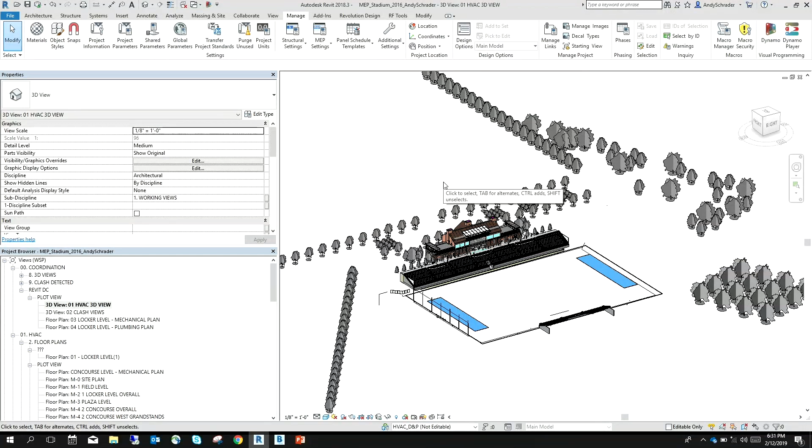So here we are in a Revit model that we're going to do some clash detection on. It is a football stadium, and you can see what it looks like. On the MEP side, which is the arena that I work in, it's going to look something more like this. As we can see, I've got the architecture turned off because for this purpose I'm just going to do structure, which is what we're pretty concerned about while we're doing our MEP modeling. Here we can see everything that's in here - we've color-coded the mechanical, electrical, and plumbing. The HVAC is green, the electrical is red, the plumbing is magenta, and technology is blue.

All right, how many people out there use the interference checker?

This tool has been in existence for a long time, and I feel like it's really lacked a lot of functionality that could be added to make it awesome. If you're doing clash detection, a lot of us probably go to Navisworks or some other platform to do it. It was awesome when I learned that clash detection is in the Revit model, but it's not that great.

Tonight, hopefully I can persuade you with this process to possibly use it. First thing we're going to do is create a project parameter, because we want to grab those elements. We're going to do clash detection, which says this element is clashing with this element. Revit is a graphical database, so it's going to assign those things a number. We'll capture that number and put those elements together. Simple as that. So first we want to be able to label those elements.

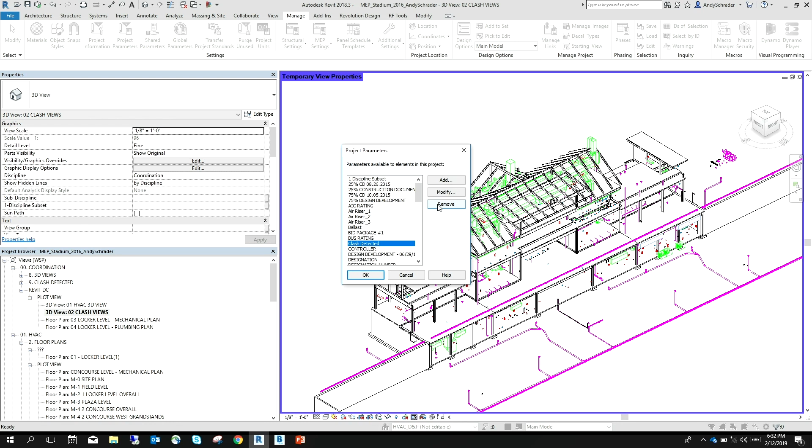So we'll come down and create a project parameter. I've already created it, but I want to talk through what's unique about this. We gave it a name, clash detected, and given it the type of parameter as text. I used to use the yes/no parameter because that worked perfect in my mind — does it need clash or is it not clashing, yes or no?

But the functionality of whether it is in a group or not, you can't manipulate yes/no if it's within a group. So using text, I can do that outside of that group, which is the reason I switched over to text. Then I'm going to come over to the categories.

You have all these different categories in your Revit model. What I want to do is just grab the ones I'm going to see in a 3D view and that I'm worried about with clash detection. So you can see I've got these checked: air terminals, cable trays, and the unique thing I want to leave out are the things already grouped together, like a cable tray run. A cable tray run is fittings and cable trays put together into a group.

So if I've already got them independently, I don't need that system or run. You'll see with the cable tray runs, conduit runs, and duct systems, I don't need those because I've already picked out those parts independently by having duct accessories, duct fittings, and ducts. So we'll go through here and check all of those items that you're going to see in a 3D view. There are things you don't need checked, that you don't want extra parameters lingering within that family, like grids or zones or levels. So essentially I've gone through and just checked those items we're going to see in the 3D view.

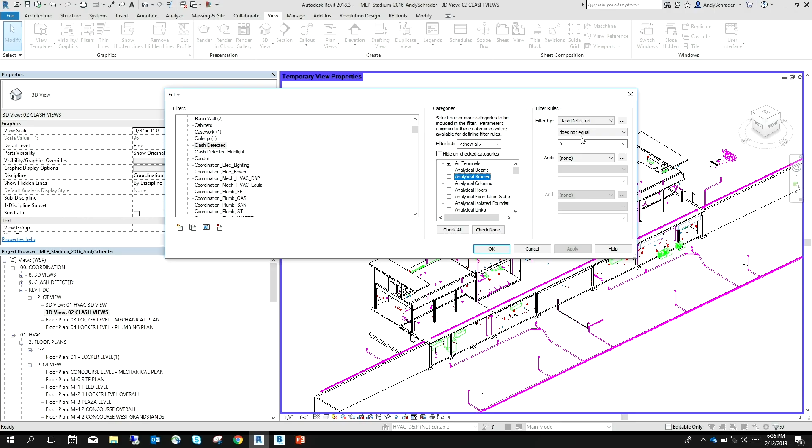So I can back out of that without ruining this whole list. Then we're going to assign that project parameter a value that does not equal Y. So we're assigning this Y, meaning yes, this is an element that is clashing. The reason we want to do that is because we're going to use it as a filter, looking for all the things that are not clashing so we can turn them off. It's kind of the inverse of what you might be thinking.

Then we have another one. So now we've just created that, and we're going to duplicate this. We're going to call it highlight. With highlight, what we want to do is make this thing shine among all the other things that are not clashing, so that way we can see what parts and pieces are clashing with the other elements within our model. Does that make sense? You'll see when I get there.

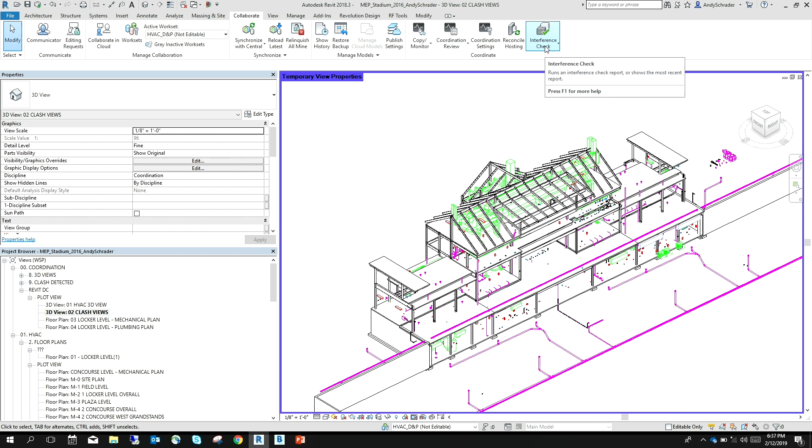All right, perfect, so that part's set up. The next thing we want to do is jump over to the interference checker. If you've used it before, you can run the interference check, and the way we're going to do that is just select these elements within our model, like so. The nice thing about this is I'm not doing my whole model, I can grab parts and pieces out of it. So if I'm doing a particular amenity space, I can focus on that, whereas in Navisworks I'd have to do a lot more setting up of a particular region.

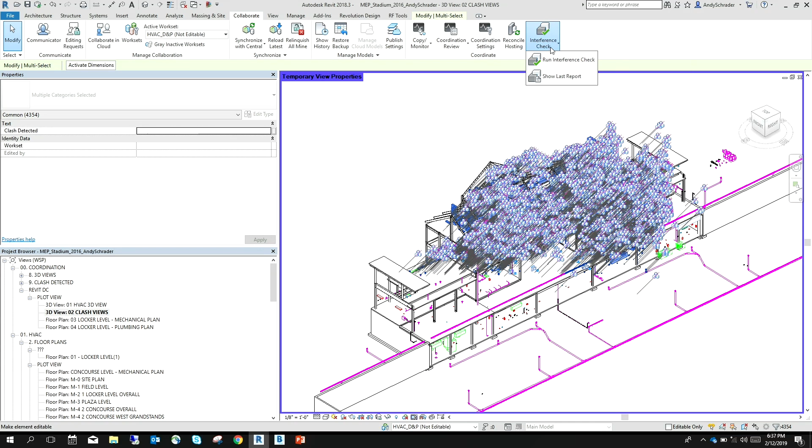So we're looking at 4,354 elements that I'm holding onto. I'll jump back over to the Collaborate tab and go to my interference check and run an interference report. If you've never seen this before, it's column A versus column B, all the things I have selected on the left versus the same things I'm looking at on the right. For this particular clash, I'm going to do my MEP versus my structure, so I'll change this second column to my structure model, and I'll select the items I'm concerned with here: columns, foundations, and framing. And I'll say OK.

Once again, if you've never seen this before, you're like, wow, that's pretty cool, I can do that. Well, then I get this dialog box, and this is where the unfriendly portion of this comes through—it's nice that it tells me all of these things, but then I have to do a lot of clicking to actually get this data to do something for me. So if you open this up, for instance, I can see that I have an air terminal clashing with this particular beam, but it's a lot of work to go through all of these clashes, and right off the bat I don't even know how many clashes I have.

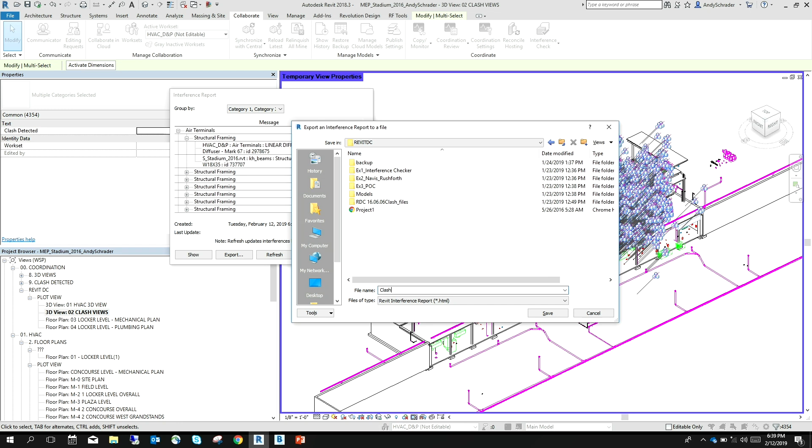So the way around this is we're going to export this. If you export, this is going to make an HTML, and we'll throw that into a nice folder that we've pre-baked, and we'll call this clash, and we'll put a date with it, 12/19. Awesome, all right, so very quickly we've done our clash.

That data is sitting somewhere else, and I'm going to close out of this. All right, come on, get my model back.

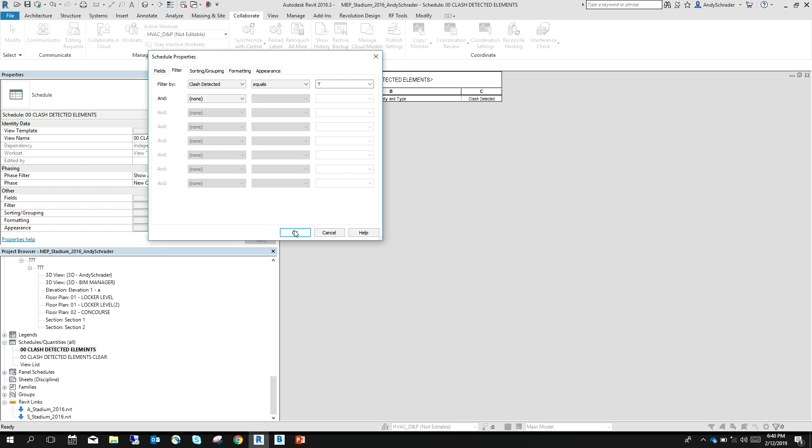Just to show that there's no smoke and mirrors here, we have a schedule that we created that is looking at these elements. Essentially we're creating this multi-category schedule, and it's just pulling out whether that family is on a particular level, what the family and type is so we can see what it is, and whether that value is clash detected. Remember, we're going to assign it a value—haven't assigned it yet. And then we're just filtering by all of those elements that have this value. So we're going to access that. All right, perfect, so now we've done all that.

Let's jump over to Dynamo. So we'll go to our— I'm going to use 1.3.3.

Does anybody not know what Dynamo is? All right, perfect, awesome. I will take that as I totally know what that is.

All right, so I've got it right here. I'll open that file up, and it looks like this. So as you can see, it's not super huge.

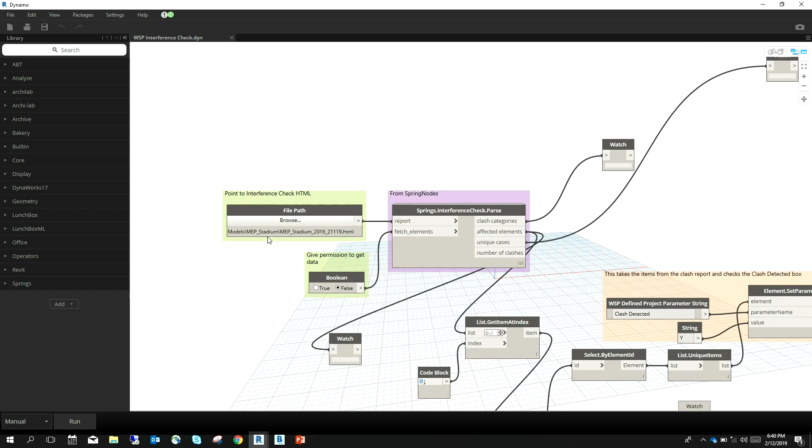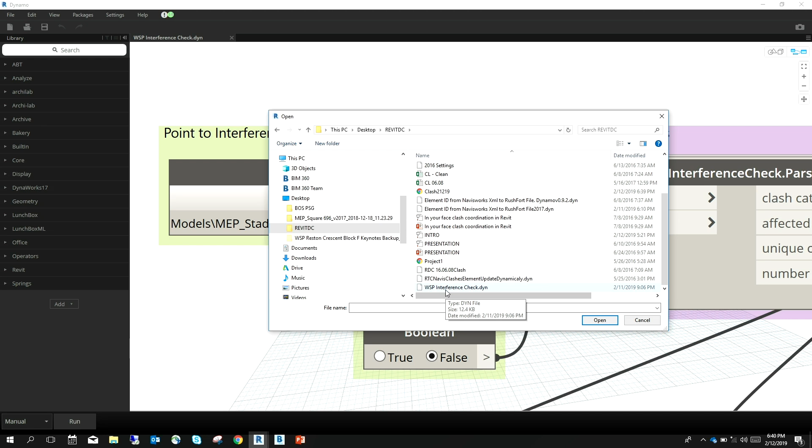The first thing that we're going to want to do is point to that HTML that we just set up. So I go back to my folder. There's my Clash, and I'll open that up. So now I'm pathed to there.

What's the rest of this stuff do? Well, I'm going to look in that file, and I'm going to use this package called Spring Nodes, and it's going to pull that data over, and then it's going to fetch those items within an HTML that's broken out into a crazy structure, if you've ever opened up one of those before. I don't know programming enough to decipher why it's all spaced out like that.

But then you've got all of this data that you could pull out of that. So clash categories, affected elements, unique cases, number of clashes. That's going to make a list for me. So if you'll remember, I had column 1 and column 2 out of that, and I'm going to separate out those columns so I can pull that data into my model.

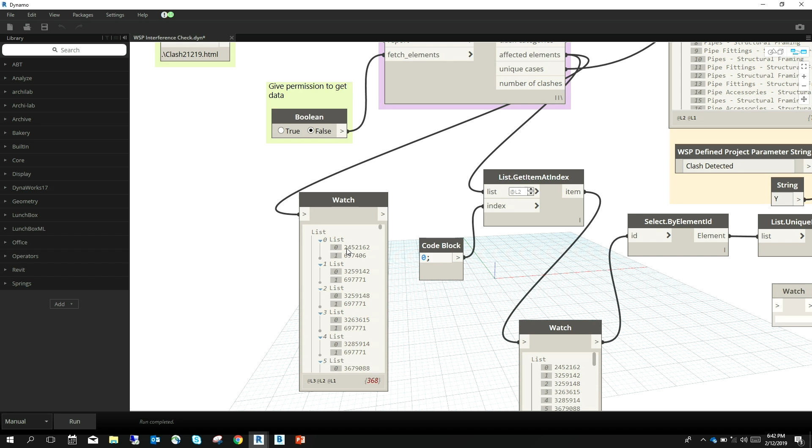So I'll just run this so that we can talk about it. Boom. All right, so here's my list right here, and you can see that there's list 0 and list 1, so that's 1 and 2.

And what I'm going to do out of this get item at index is I want all the items out of 0, which was my MEP. If you remember, the first column on there were all my MEP objects, all the other ones were the structure. So for this first take, I am going to do the MEP objects. And then grab those unique elements, and you can see that they're green over here, so they're live within my Revit model. Perfect. So just like that, I can move this piece.

All right, so I've already run it. And now we'll see that now the schedule is populated with all of this stuff in our model. Perfect.

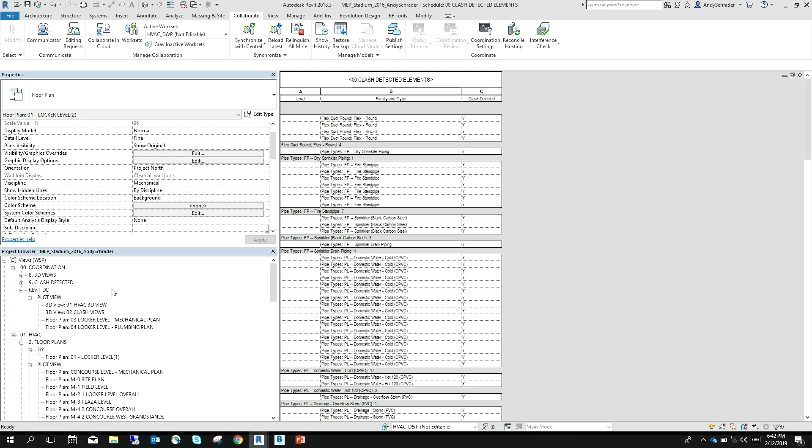So let's go back to my Clash views. And I'm using a temporary view property. I'll take that off.

And here we go. We are now showing these elements within the model that are clashing with that element in my linked model, the structure. So right here, you can see that value has been given a Y. So I'm just filtering out those elements in this view that have a Y, and I've turned off all the other elements that don't have a Y so we can see them.

But now you're wondering, wow, what about all the elements from my linked model, right? That's what we're all thinking. How great. So now we're just going to do the inverse of that.

And the way that we're going to do that is set up our structure model. This is the model that's linked in that we got from our structure. And the nice thing about this is that we don't have to go through all the work that we just went through. I'm going to take this schedule that shows all the stuff that I need. I'm going to right-click, copy, go to my structure model, turn around, and open that up. Can you see that dialog?

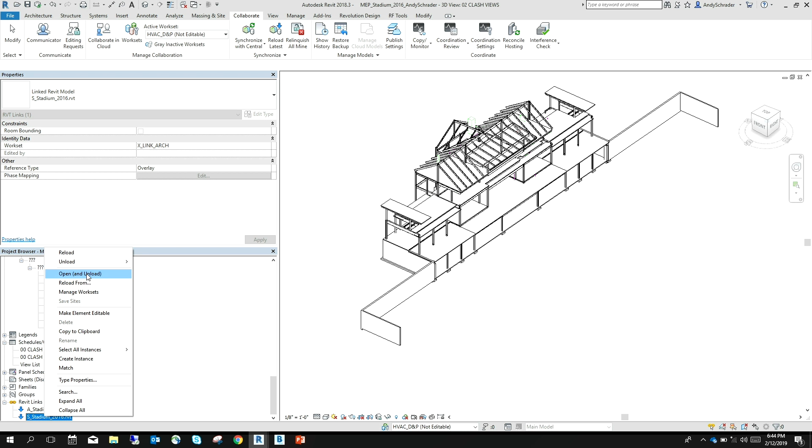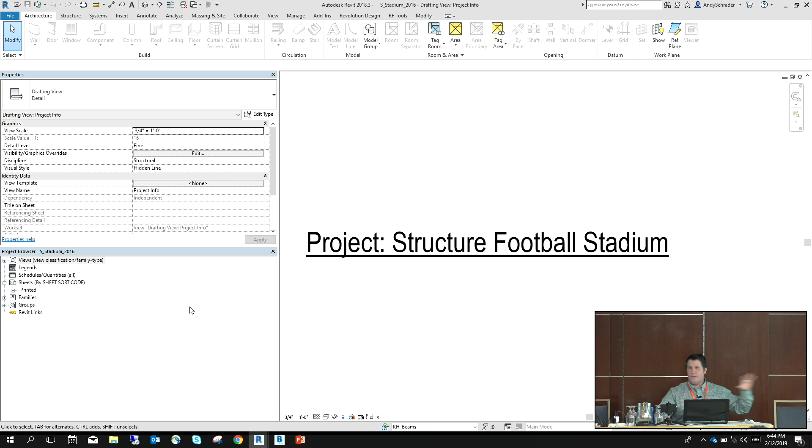So now within the project browser, since I'm holding that onto my clipboard, I'll click in the project browser, go up to my Modify tab, and I can paste that schedule into this linked model. It gives me the schedule, what it went through and did. Also, behind the scenes, whether you knew this or not, it created that parameter, that project parameter that I went through and had to go through all the categories and do all that stuff. So I didn't have to redo all of that, which is great.

Time saver. So now what I want to use is Dynamo, because I still have all those values. Everything's on the opposite side. And if you'll remember, or if you've ever used Dynamo, you can only use Dynamo in the same session that it's been opened up in. So now I'm in a separate session with a different model.

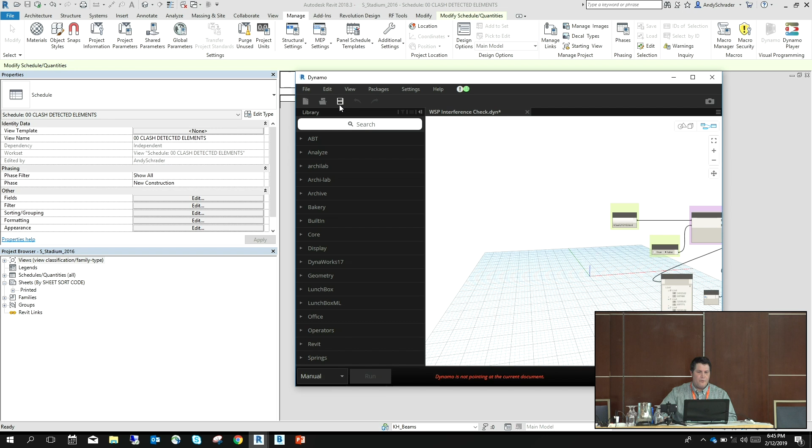I got to close out of this. So I will save this to keep all my paths. Close that up. Turn around. Open it up again. It's sitting right there. And then I will run that.

Uh-oh. Oh, silly Andy. All right, so I just ran it by accident, and I remembered that column 1 is MEP, column 2 is structure. I got to change this value from 0 to 1 so that I'm looking at the correct list of elements.

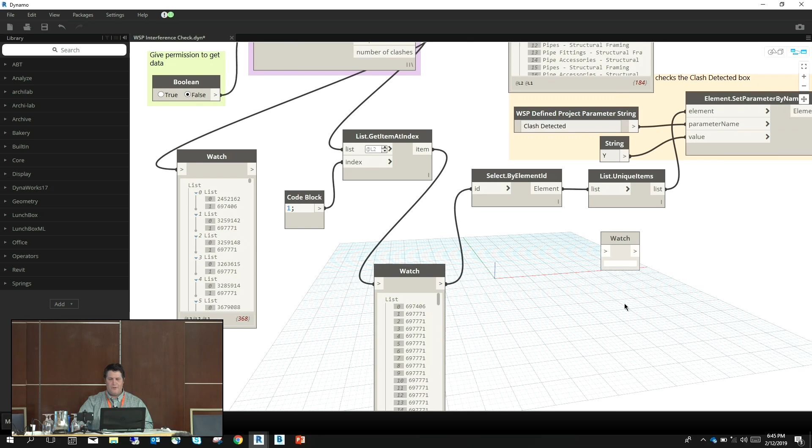So now when I run that, different set of elements. Here, they're over here green. And my schedule's populated. Ta-da! Awesome. All right, tough crowd.

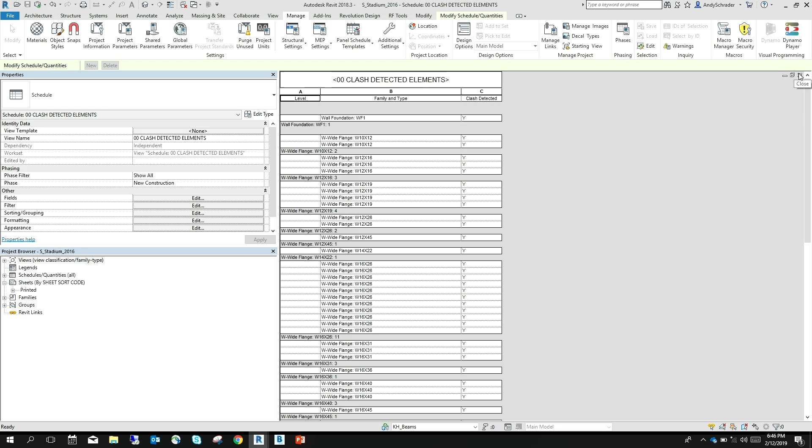All right, so I'm going to save this. All right, so I'll save this model. Just like that, I'm done. I don't have to do anything. I don't have to go explore the structure model, figure out what's turned on. I can visually see it from the list.

I'll close this. Close this. Now I'm back in my MEP model, and I'll reload that link.

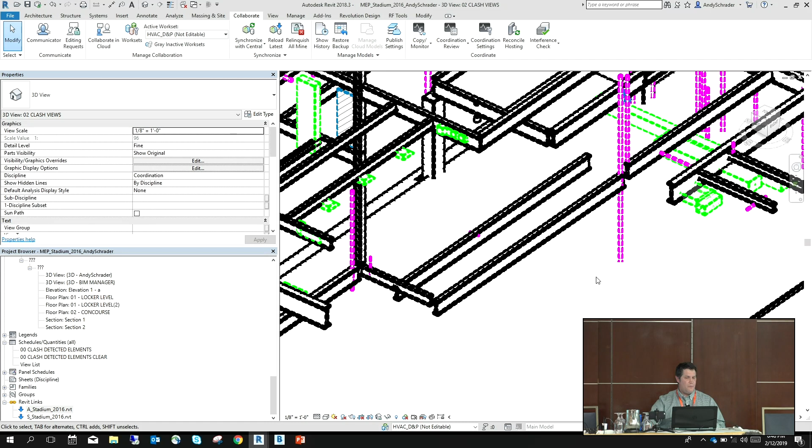Boom. All right, so now I am only seeing those elements that match that criteria that I'm looking for. I've assigned yes to my structure and my MEP elements, and in this view, I'm only showing those elements that say yes, I'm clashing. So ultimately, through this process, you should be able to see everything that's clashing. All right, wow, awesome, great.

All right, awesome. So what else can we do with this data? Let me check my time. That we have, so this is great. It's in a 3D view, but how can we utilize the fact that we now have all of our clash data visible within our model?

We're looking at it in a 3D view because it's fun. Let's go check out a floor plan, wherever I put those. So in a mechanical plan, we've done something like this.

Can everybody see that all right? So with a view template, and I'll come over here, show you what the view templates look like. I am using a clash detected highlight, and I am overriding that value so that it's 9. How many people use 9 in their Revit models?

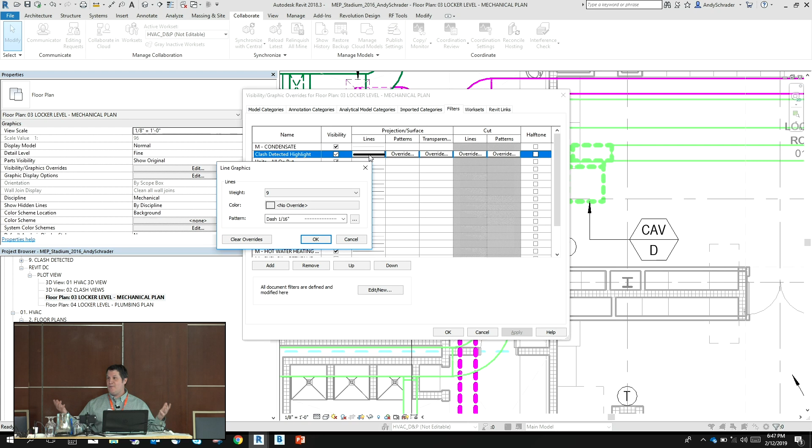Of course you don't. So I made it 9 because that way everybody's going to see it. And then I gave it a dash just in case somebody's using some other type of line work that would make that stand out. So now we have two things that's going to make this thing stand out in a view: one, it's really bold and annoying, and it's dashed when it probably is going to be a continuous line anyway.

All right, so now we can see those, right? That's pretty cool, we can see that. We can now create sheets, we can create coordination sets, we could do so much stuff.

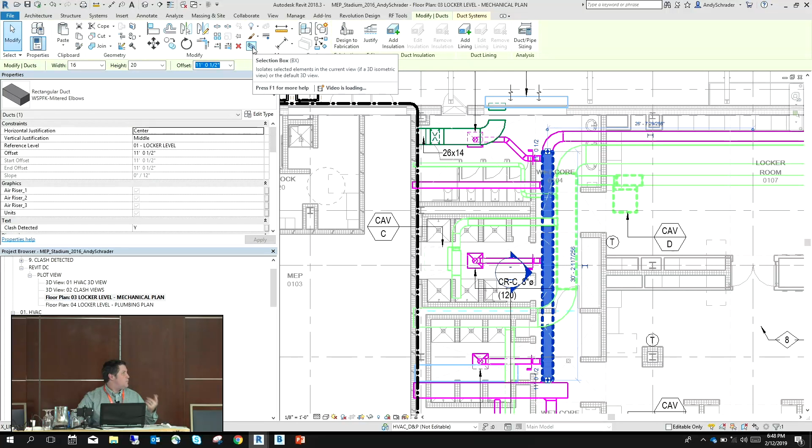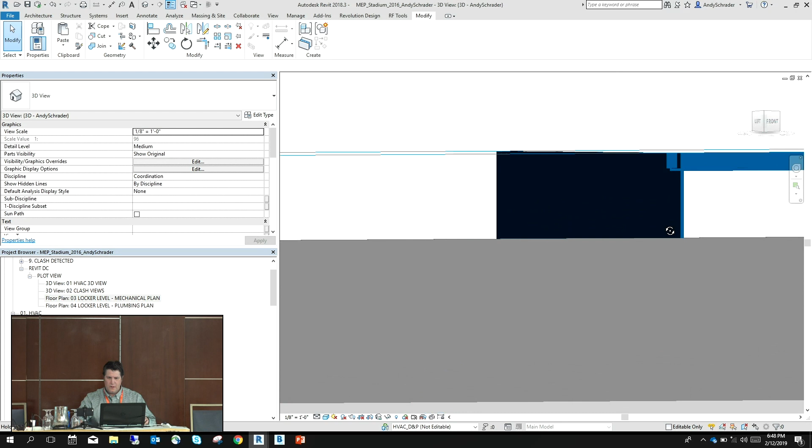One of the fun things about Revit and some of the newer features is being able to select this element, and then we have the selection box up here, so I can say, what am I clashing with? Then I now have a 3D view that is showing, and it's kind of hard to see because it's so bold, but if I turn this to thick thin, I'm running into these pieces up here. And so now I can navigate through the project by closing this out, going to another piece.

I'll turn that back on so you can see it. Let's see, let's jump to the other side and see. I thought there was one over there. We'll grab this VAV box, we'll see what we're... All right, so now we can, here, I'll turn that back off so you can see that that clearance is running into that beam. But now we can use this tool, and this is inside of here.

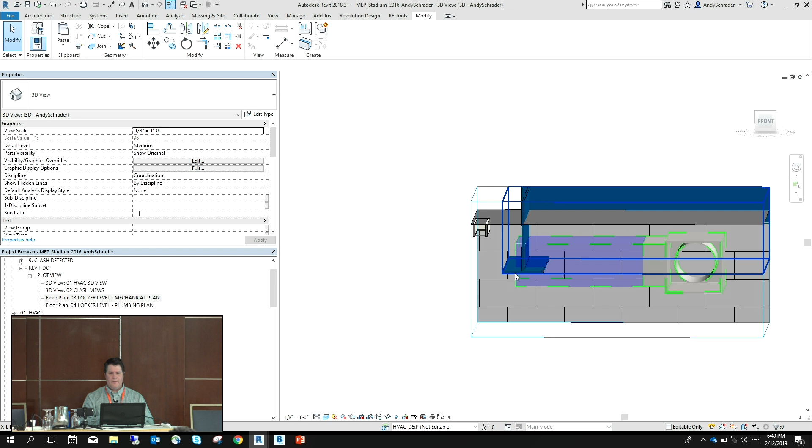So what else could we do with this now that I've got a couple minutes left? We could create plans, add another parameter, throw a date on there or something like that so we can track what happens to this value, whether it got updated or didn't get updated. We can take 3D views like this and publish them off to BIM 360, Glue, or somewhere else so that maybe a project manager or somebody else that's not savvy within the product can actually see what's going on in that model and see those elements.

I'll jump over to a plumbing view just so that you don't think I'm... All right, so we'll see. Do we grab any plumbing out of here? With that clash test, I might not have. Oh, there, it looks like there's something right there.

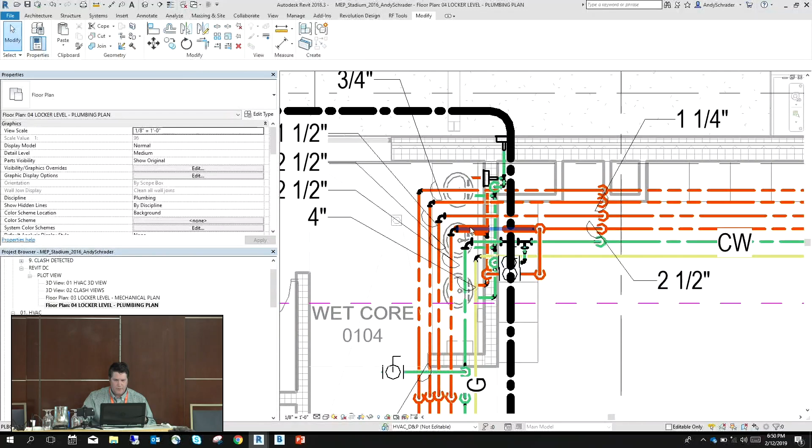All right, so once again I'll use that section box, and then we spin that around and see that we're running into, boop, we're just grazing that beam right there.

All right, so that is how we can get our clash into the Revit model. And so what do we do after that? What if we're about to print and you don't want to print your set with all that stuff on it, right? That would look crazy.

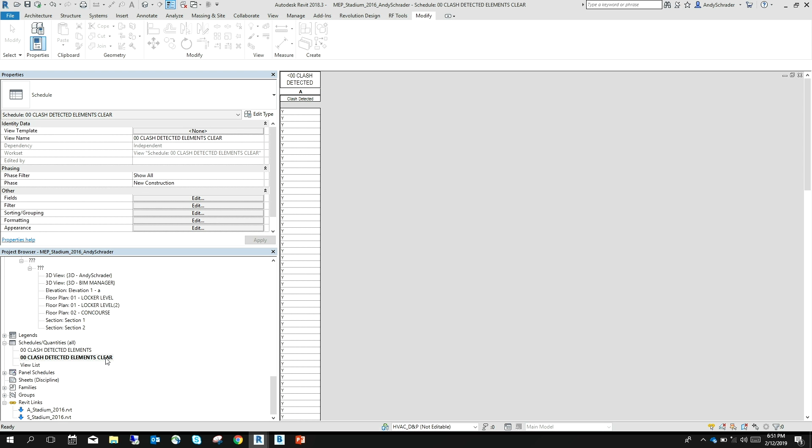What we'll do is create a schedule. One, you could create the filter and not apply it to the view, of course you could do that. Or if you wanted to just create a schedule, and these are all of those elements, I'll just make this not itemize all the instances. And I will delete that value.

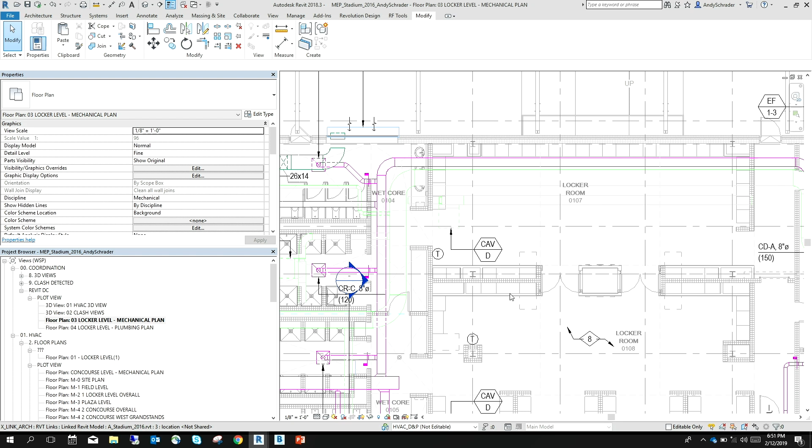So now they're all gone. And if I go back to another plan, everything's back to normal, no big whoop. But I still have captured all of that data within that HTML file, and it's timestamped. So if I need to clean it up and then I want to pull that all back into the model, I've got it, and it just takes a quick second. So, all right.

Boom. There we go. How about that? Did I make my time? All right.

Does anybody have any questions? Let's do one here, and then I'll work over. You guys can use the mic. Can you share that Dynamo script with me?

Sure, absolutely, there's nothing special about it. Does that answer the other questions we saw? Okay, now there is a way. I just use the interference checker because it's free. Everybody loves free, Dynamo's free and interference checker's free. But the same process, the same concept can be done with Navisworks and pulling that data, because what we're getting from Navisworks are those element IDs, and just pulling that data back through Dynamo and funneling that into your Revit model.

Are there tolerances for the clashing within that setting? Not with the interference checker, it's all hard clashes. And then do you have to model your clearances for MEP stuff a certain way? Well, they're tied to that model, to the mechanical element.

Anyone else? There's one in the back. Oh, way in the back. That's gonna be wild.

Is this a one-time setup, and it's going to be dynamically updated if I fix the clash, or do I have to run the script every time I fix the clashes? Great question. If you fix that clash, that element still is branded with that value. So yes, you would need to clear it out and rerun it again for it to not have that value.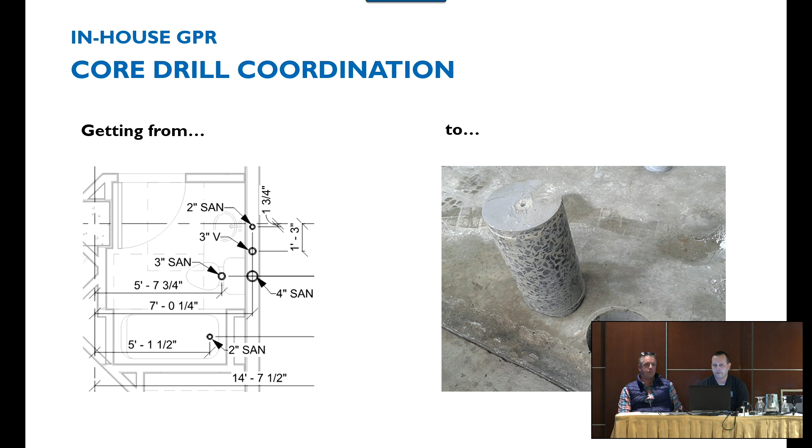There's a few different pieces of technology out there that you can use these days. You can look at as-built drawings - everybody still does that, which is fine. You can review the existing structures, figure out field non-destructive testing. There's ferro scanners, there's x-rays, pros and cons. Some are definitely better than others, different requirements.

So typical coordination process, typical as in what we've seen or done in past years: we figure out all these core locations, which then get marked in the field by the subcontractors. So we're the general contractor - our plumbers and everybody else would literally go out to the field. That's in your scope of work, go lay it out. So they would go through. That would be sort of step 1 or 2.

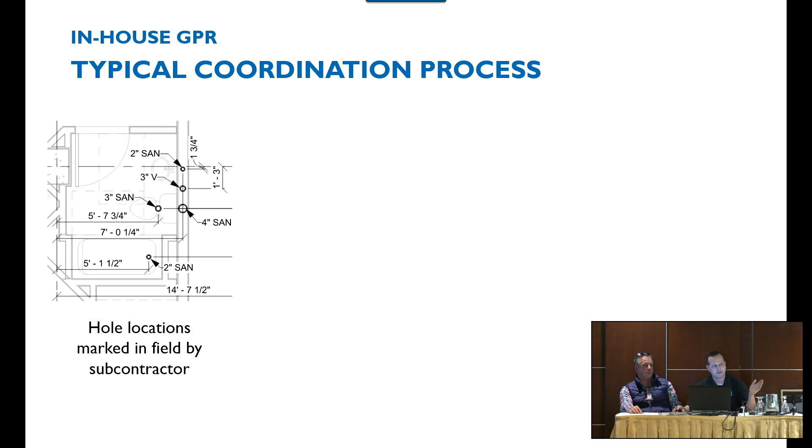That individual would then call or contact a third-party GPR consultant. They're out there, we all know. So then a little bit more time goes by. That trade would come out and physically mark on a slab, top bar, bottom bar, as well as how they relate to the proposed core penetrations.

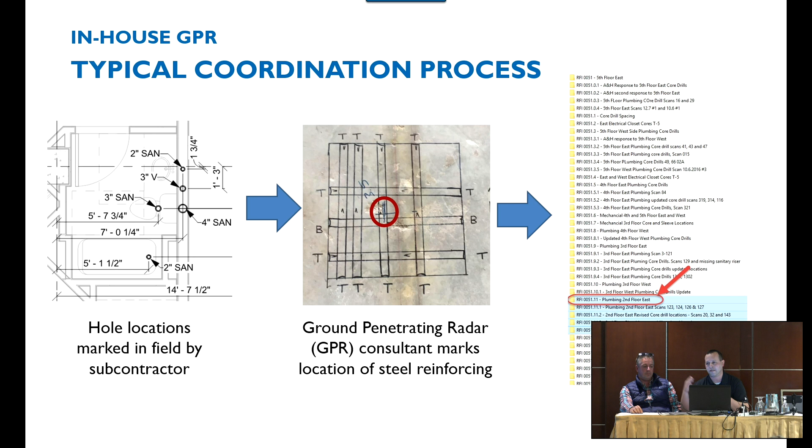Ultimately what ends up happening on our end, or what was happening before - this is one of our actual past projects - we would then get a report from that subcontractor, so there's a little bit more time. The GPR consultant needs to put a report together, gives it to the plumber, they look at it, they send it to us. You're talking weeks, sometimes a month before you get these reports.

What you see on the far right there is one of our previous RFI 51. The one that's highlighted is actually revision 11, but every single one of those folders relates back to RFI 51, which was designated as the RFI number that would track every single core. I think there were more, but I'm up to 15.1 at the very bottom. And they all relate to cores, different levels, different areas, different core numbers.

So the RFI on the left-hand side here is one single RFI, which is RFI 51.11, and it consists of 143 pages - in other words, 143 cores in the one single RFI. Just like I said earlier, there will be thousands of cores.

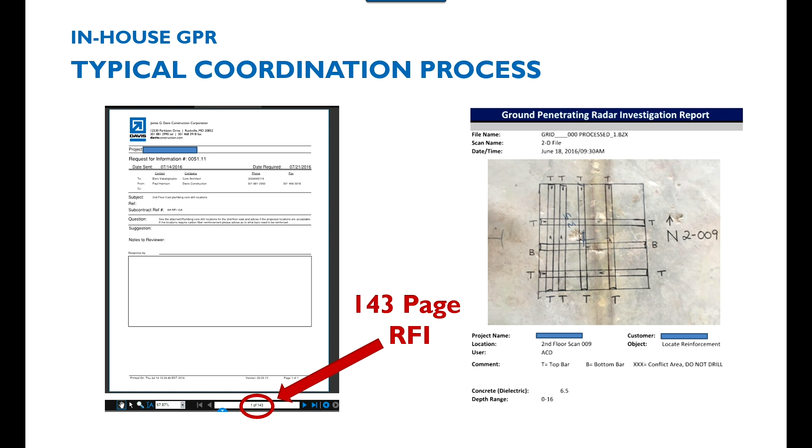The question is, how do you efficiently manage this process, right? So now you have these massive RFIs. You have physical layout in the field. And then you get this - somebody's out there laying out these cores, diameters. They put it together on a PDF, which is fine. I mean, you're sharing information. There's the north arrow.

The problem really comes when things get shifted. So you lay out per design - if it doesn't get relocated, that's not a problem. Once things start shifting around and people are making adjustments in the PDF, we start losing valuable information.

I don't have the time to go into a 143-page RFI every single week and track where is this on plan, which way did it shift. So you start losing very precious information.

And what ended up happening through this process was our models basically became invalid very quickly. In other words, we were getting calls from the field saying why is the riser through the duct? And we're looking at the model, and well, the riser is not through the duct. Well, apparently that core shifted at some point in time. Nobody knew where it shifted to or how it shifted, so the models just became useless.

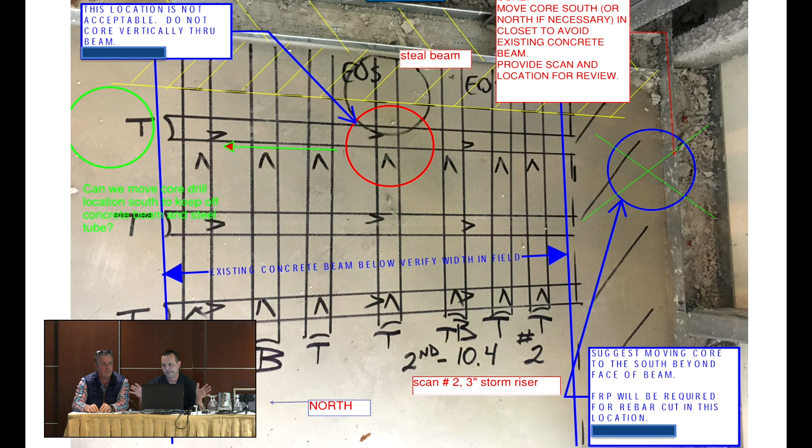So this was a challenge on numerous projects. Basically, as lessons learned, we've come up with a new initiative, new opportunities to try to do this better. So thinking a little bit outside the box.

On this particular project, with our design teams and other professionals, we've established a structural modification guideline: where can you core, where can you not core. If you're in this area, you can cut this many top bars, or none at all, or maybe one bottom bar, that kind of thing. So we have a set of rules and guidelines based on the structure we're working with.

We then take all the in-house technology with regards to the robotic total stations. I don't know if everybody's familiar with them. Everything is based off of an XYZ point coordinate value. They're not necessarily robots, but they assist us with point layout, properly laying out points in the field, with regards to how they relate to the drawings we have in-house.

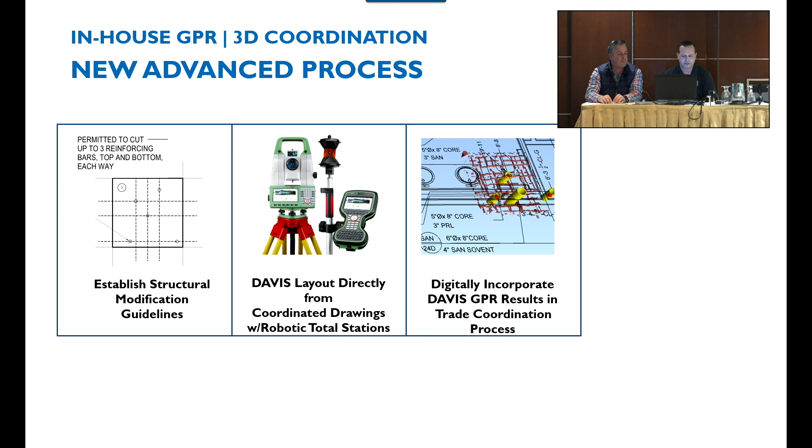We then capture this GPR data, the ground penetrating radar information, and we now incorporate that into our Navisworks models. What you see there is an example of an actual batch scan. This was one when we were testing, but it generates 3D images of the actual top and bottom rebar. The yellow is the 3D cores from the plumbers, and the red spheres are the actual points from the field. We'll get into that further down the line.

Lastly, we saw this once we started studying the process. Just like I mentioned earlier, there were so many people involved. We literally went through a pull planning session about this whole process, and we figured there were so many individuals involved and so much time lost in the process that we chose to take full ownership of the entire process, literally from start to finish.

Traditionally, laying out the core locations in the field was done by the plumber. The GPR scanning was done by somebody else. The GPR data processing and the RFIs, the plumber would send to Davis. And then the core drilling would be another trade.

So now we basically perform all the layout in the field. We manage and perform all of the GPR scanning. We also manage and complete all of the submissions. And we own in our scope the core drilling subcontractor. So we manage everybody, start to finish, and everything in between.

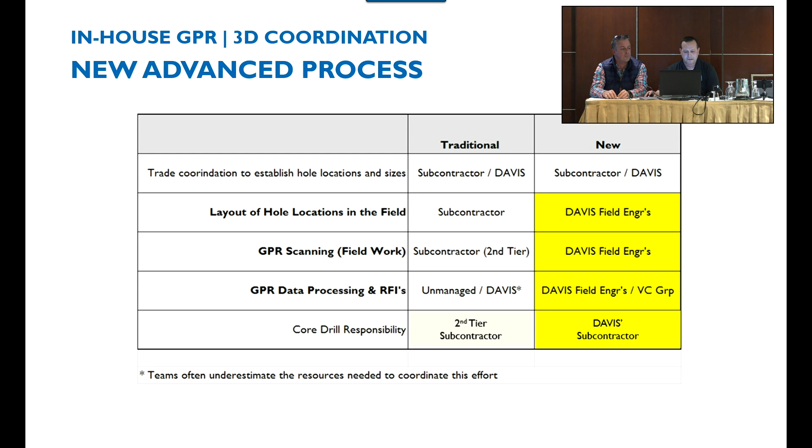When it comes to the overall process, when I said we put together a pull planning session, myself and a number of different individuals, based on lessons learned and past experiences, peeled this whole thing back and said, where do we typically start, where do we need to go, what happens in between, and how can we better facilitate this process?

One of our structural engineers is actually in the room somewhere - there she is, Jennifer. Before this project started, we put our thoughts together, and very early on we presented to the owner and design team this new initiative based on lessons learned in the past - we wanted to do something different. Everybody was on board, and it's an ongoing process that's actually going fairly well. It's not perfect by any means, but we're definitely doing much better than we used to. At least I'd like to think so.

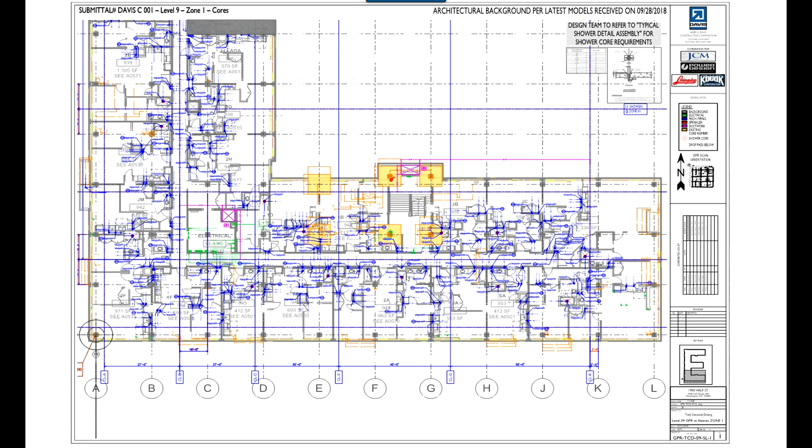With regards to the actual process, I'm sure a lot of you on the submittal review or design side have seen submittals come through. There's really nothing too special about these submissions - this is an annotated PDF. Everybody is color-coded; each trade has its own designated color. If we zoom in, you'll see more of this information. Green is electrical, blue is the plumber, magenta - we don't have too much here - is the duct risers, and red would be sprinkler. In this case, some of these other cores are kind of unique, so they're also isolated as such.

Orange is the existing. Each one of these cores, though it's kind of hard to tell, has a unique identifying number. So every single core on this project, we know its location - XYZ, diameter, thickness of the slab - and all that information, as well as how it relates to what is in that slab for that specific core.

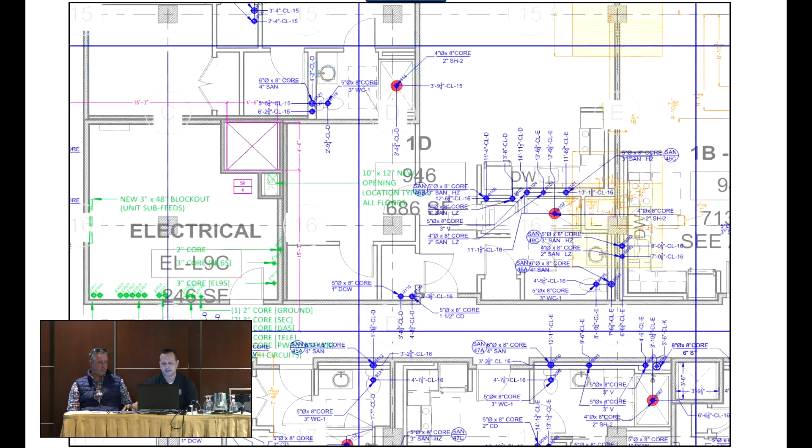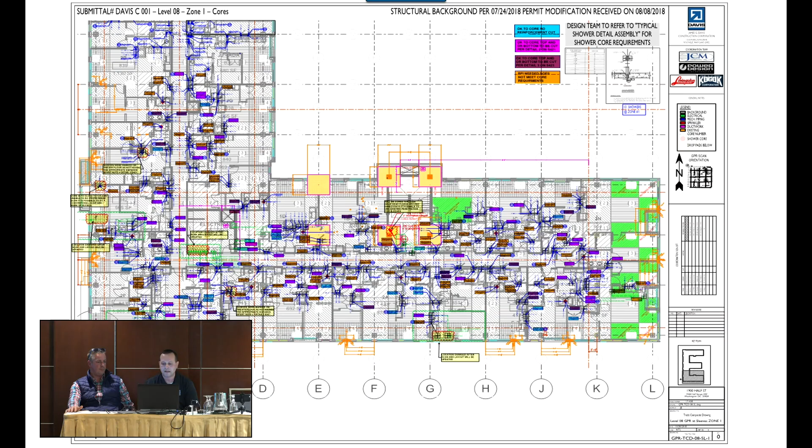So here's a sample of our submission that we initially put together within my group, in operations. It then goes to the field where the layout engineers perform the GPR in-house, and then they perform an in-house review as well prior to submitting to the structural engineer. We perform the first pass based on what we've seen, and this is a close-up of it.

When the structural engineer gets these documents, we provide a complete package, inclusive of all electronic files, because another challenge we had in the past was when a core is individually relocated in the field. If you're looking at those GPR marks on the slab, it's very hard sometimes for the designer to determine should I shift that whole wall 40 feet down the line, or should I just deal with this one core?

So providing everything electronically to the design team allows them to study if a core needs to be relocated. Here's your plan overall. If you need to relocate a whole wall, it's a lot easier to share and discuss that information. In this particular case, these are hyperlinked PDFs.

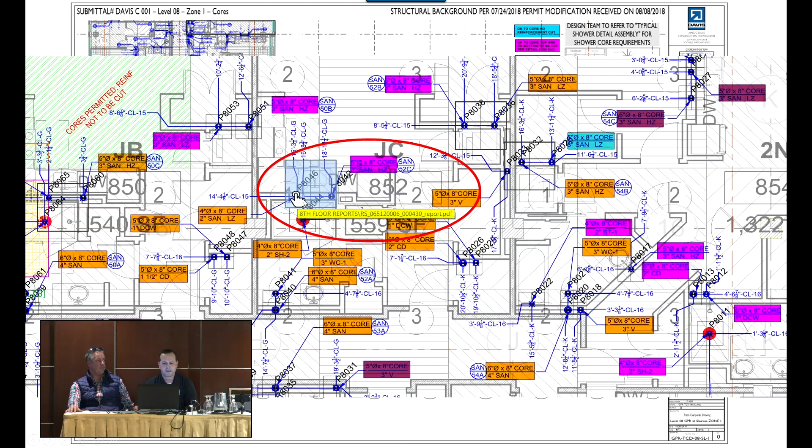Everything you see here is done by Davis. The structural engineer gets these documents. There's a little hand there. When you hover over a specific core, it's going to bring up a very specific GPR report. That report will pop up, and you'll get a top and bottom rebar report, which it's kind of hard to tell, but it'll actually include the core locations as well.

All right, so that's kind of a sample.

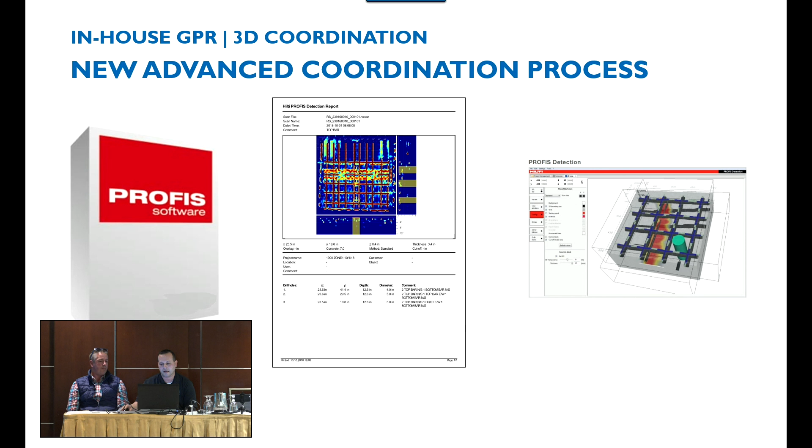Profis is a Hilti piece of software that we've incorporated, so this is kind of the new component that's come into play from our end in order to facilitate this process. We purchased the equipment, we were trained, and we now incorporate it into our process, basically. So we've sort of eliminated a lot of the in-between and the time lost, and we just took ownership of the actual process from start to finish.

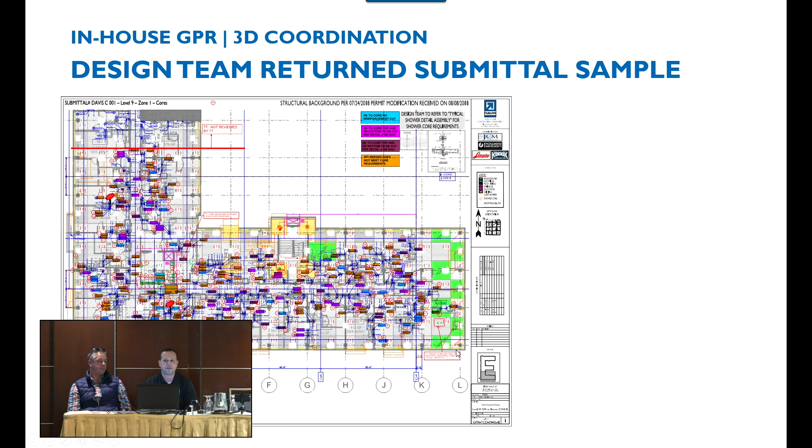With regards to the return submittals, this is what comes back to us from a sample. Here's a blow-up. So what we do with these documents when we get them back, and you'll notice here real quick, the building, the new structure is going to be shaped like a number 3 or a letter E. So the whole idea behind this was to capture and approve as close to 100% of these cores by zone.

Another struggle we've had in the past on a lot of projects is the fact that cores get lost in transmission, in the RFI, and the superintendent can't close certain walls. It's total chaos last minute. So we wanted to basically focus 100% on each zone and capture all of the cores before moving on to the next zone, or at least have the knowledge of which cores need to be further evaluated.

When these submittals come back to us, in Bluebeam we can do a very quick search depending on the comments that come back. There was definitely a learning curve. We've done I want to say 7 or 8 levels of zone 1 thus far, and it is an ongoing process. Now that things are starting to settle down, it's typically maybe 10 to 15% of the cores.

We submit about 200, close to 200, 210 cores per zone. And we're seeing about 10% of those come back, either because we couldn't get to them due to material stock or access, or the structural engineer might have a question needing further clarification. So we're seeing about 10%, 20 cores or less, come back in need of further addressing.

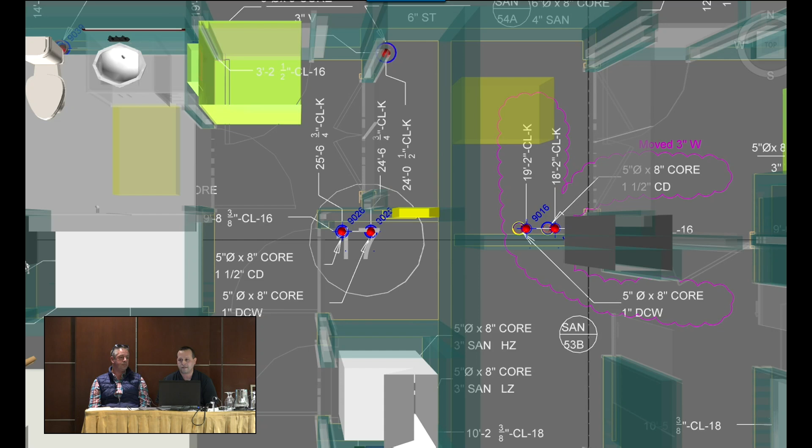All right, so how do we incorporate all this together into Navisworks, which is what we use? We're not going to talk much about clash detection, MEP, we're doing all that already. This is sort of a further step. What you see here is basically all we're doing is we're asking our trades to annotate their files early.

We have a certain diameter system coming into play. We really want to know what core diameter you need for that system. So if you have a 6-inch pipe, do you need an 8-inch core? That's what the structural engineer wants to see. So we had them provide us with fully annotated drawings early, 3-dimensional cores.

And then what's happening is, since we're doing all the layout, every point number you see noted here in blue comes from the Davis field engineers. We use APL to pull in those text files, and then we give the points a volume and a color, so we make them a red sphere.

You'll notice here on the right, 9016, there's definitely something wrong. The sleeve is actually west of the shot that we took in the field. But you'll also notice there's a note that said moved 3 inches. So as a result of the GPR review process, the core was relocated 3 inches to the west. The annotated documents are updated, and now Davis can easily see that change.

So now, after the fact, we'll go through in the field and do a cleanup process of these levels. I'll show you a couple more examples here.

This was the electrical, so the red represents the initial layout, which for some reason there was some discrepancy or misunderstanding when we first submitted. The initial layout was incorrect, which is what you see in the red. The blue or cyan color is actually the new layout with the cores further spread out. So now Davis will just go back and reshoot those points, and everything will be in the right location.

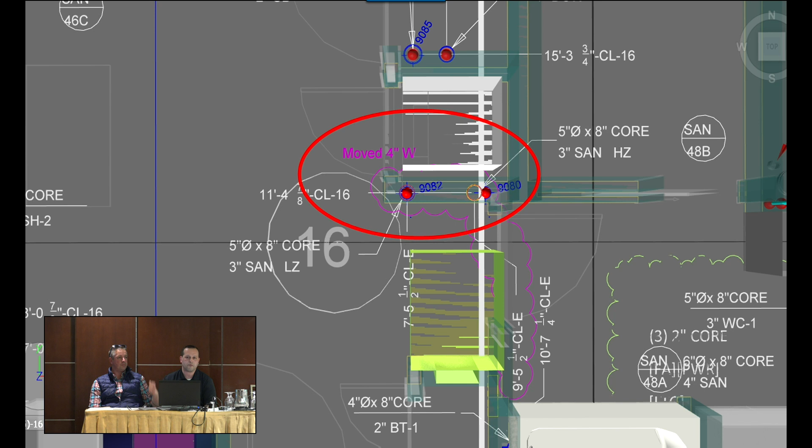Here's another example, kind of hard to see. So it moved 4 inches, and it's all bubbled. This is the information that we were missing on those other prior projects, where things would shift, but we had no idea where they shifted to, which then made the models useless.

Now we can adjust these cores. The plumbers are adjusting their risers in their models, and everything is pretty much falling into place. So I'll pass it on to Chris now, and he'll talk briefly about the laser scanning process.

Anybody in the room work with laser scanners? No? Okay, just within the point clouds or actually in the field. This new unit from Leica, I was number 3 in North America to get it here at Davis, so got a good working relationship with them.

We were utilizing a C10 unit, and for some of you that know, it was a dinosaur. I mean, it was like carrying around cinder blocks, and with this unit here, we're able to get in and out. The time is cut down tremendously, and the accuracy and precision that this unit is capable of is unbelievable. It'll spend 26 seconds inside of here, and it'll capture 2 million points per second.

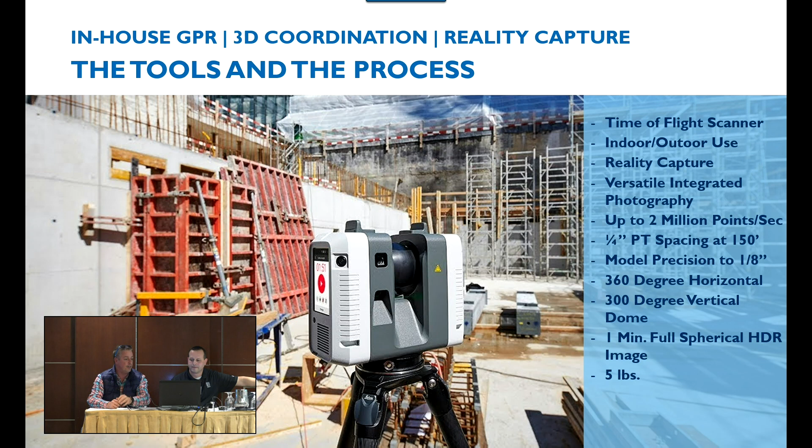So what you see in the picture here is not far from what you would visually see once you scan it and import it into a drawing. It does do the photography, and the nice thing about it is it does recognize georeference targets. So we'll establish our targets within this room. We can scan it, and the software then recognizes where we are, so then we can incorporate it into our coordinated model.

Furthermore, with this unit here, it has the capability of tracking its local position. It has 6 cameras, so as you walk, you are able to then position yourself on the other side of the wall. The technology is probably 7 years ahead of other scanning developers, just for the simple fact that it references and it sees where you're going, and it just makes it so useful and helpful in the conditions that we're in.

There might be existing conditions where it's wide open, but then we might be in the middle of a demo phase that we need to come in and scan the plenum space, or we're looking at floor deviation maps, or we're looking at mechanical rooms because we want to do some improvements. So being able to run around the project with this thing is simply amazing.

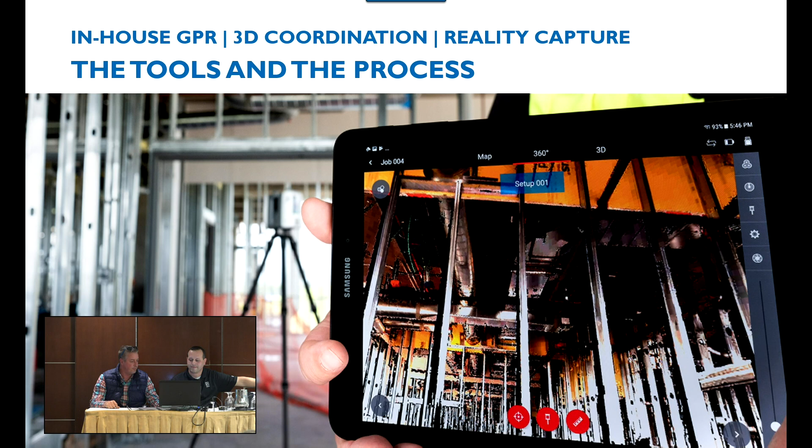So when everything starts coming in, we'll drop in the plan that Julien has, and you can quickly see the field engineer's control points and the cores that are ready to be laid out. His spheres come in, so we're able to show, hey, there's that point with the sphere, there's the core that needs to be relocated. So everything starts coming into play.

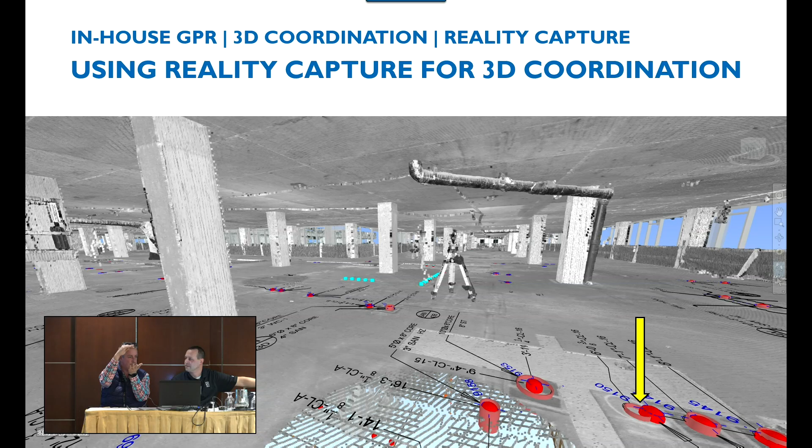On here, I don't have the colorization as far as for deviation, but we're really worried about that plenum space. There's a very limited amount of space up there for all the mechanical equipment to go in. So we're able to start seeing where there's some deviation in the floors and ceilings that are going to interrupt our trade.

So we're ahead. We're able to tell everybody, hey, we need to start looking at this. We might need to make some modifications, we might have to create a bulkhead, or figure out what might have to be done. So then the mechanical stuff slowly comes in here. You can see there's an existing drain there, so it winds up running through one of the mechanical components.

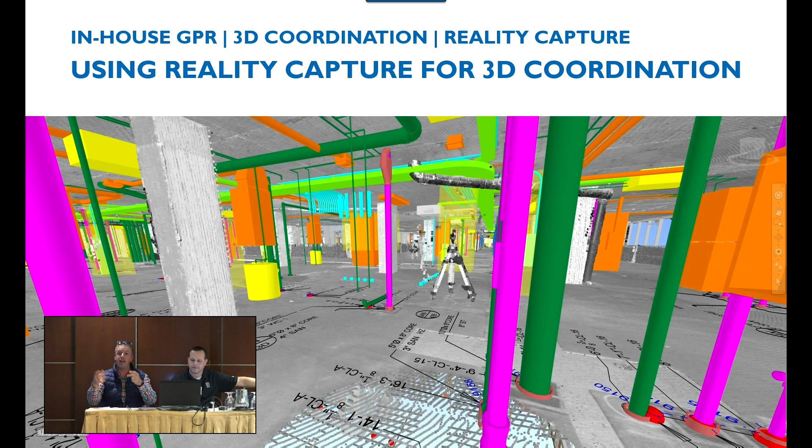So we have all this stuff locked in together, and at any time we can send somebody back out there. Once the trades begin to work, we're able to go back out and scan, and we're able to do our QA, QC on that as well.

So it's using every piece of technology out there and precise measures to make it happen, but that's where we differentiate from others.

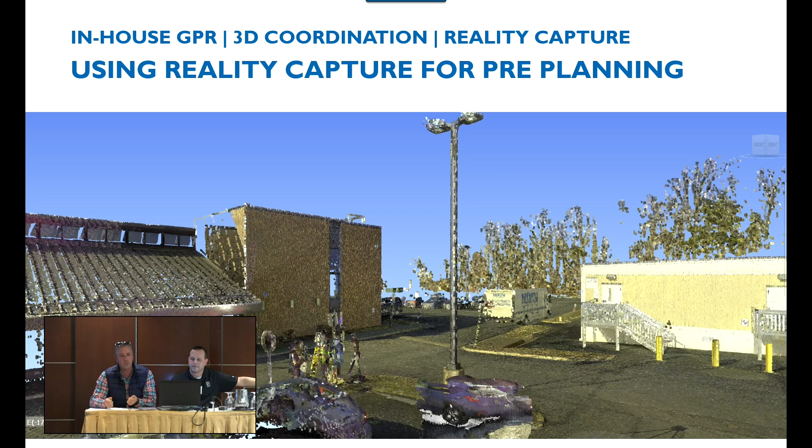So we use it for pre-planning. We have a project in Rockville that we're working on, so we went out and scanned the site. The civil drawings are mind-blowing, lines everywhere. You can quickly look over existing and new storm drains going in, new telephone lines, just Verizon - there's a whole bunch of stuff going on for this lab. So we locked it in as far as our grids and our coordination, and we're able to bring in the new building.

So we've got the scan, there's the new building that's going to be going into place, but the building over here is a modular unit, and this modular unit houses a lot of equipment that can't be disturbed until the new building's done. We have storm drains that need to run through, and we actually have to dodge around this modular unit temporarily until we get the new building done, then move everything over.

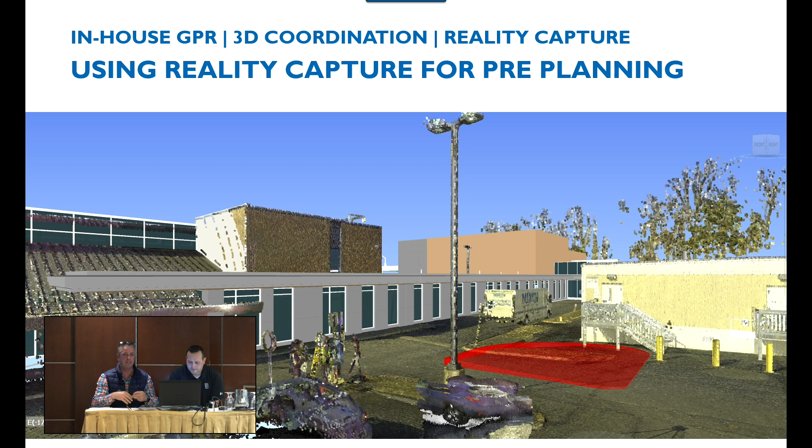So we brought the civil stuff in, and there's a bio retention area inside of the curb in this red shaded area. Underneath this, we have all the civil created in 3D as well. So we can quickly see and discuss with our team members, hey, this stair right here in this modular unit, there's an issue, there's a 10-foot cut. We need to figure out a new egress for them. So it's just being ahead instead of standing there and losing precious time.

Then we were able to trace out where they wanted that fire main and the sprinkler lines to go in, and create those CAD drawings and produce. So now these pipes are being put into production, and we're able to come back in and land everything accordingly. Just a lot of this.

So we also use it for our deviation surveys.

This floor plan here was for a studio's ABC News. So the deviation survey here, you might be confused about it, but the red is bad, okay? We can all understand that. So the green's good and the red's bad. So we have just mid-bay deviations up to 2.5 inches, and the owner wanted to come in and level everything. It was a little extensive, but we were able to do 1/4 inch, and we were able to go in there and level it up, and be able to figure out cost and time and all that good stuff. And actually, it's a big part of what we do in a lot of the different sectors that we work in.

The one here on the right is a wall deviation survey. So we have a project where the neighboring structure has a slight lean into our project. It's been like that for years. We were able to come in and scan, and you can see this yellow here turning to blue, turning to red. It's a little small down here, but it has a natural lean about 3 inches into our area there. So we have our monitoring efforts that we keep in place on that.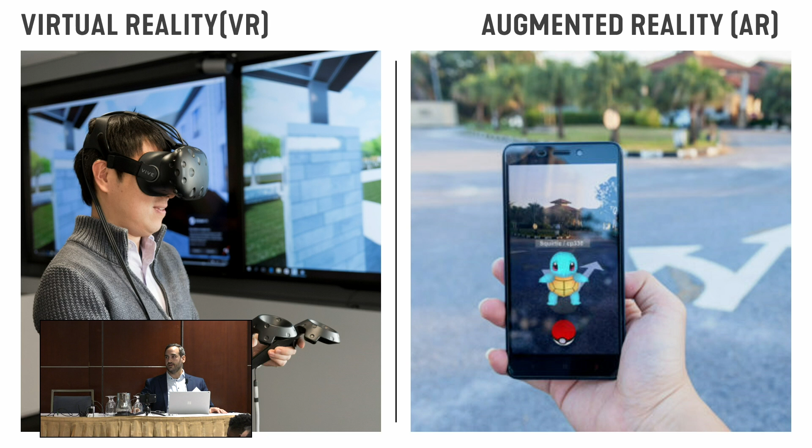So whenever I start a presentation like this, I always like to quickly just set the terms that we're working with. I think everybody in here at this point should be pretty familiar with VR versus AR, but just to recap, VR is where we're transporting to a new environment. We're sort of fully immersed and we're taken away. AR, we're adding additional information on top of the real world around us. So Pokemon Go is the easy one for everyone to see. You're looking at the real world through your phone's camera, and additional information, Pokemon is hopping out and being added on top of that piece there.

So it gets a little more complicated. People throw out the term mixed reality, and I'd like to just throw this in here. These are a couple diagrams that Microsoft put together, so take it with a grain of salt because they sort of are the biggest hardware creator as well. But mixed reality is really describing a spectrum with augmented reality on one side and virtual reality on the other. So augmented is closest to the real world, and virtual reality is sort of closest to a fully digital world. And then if we look at that bottom graph, you start to see an interesting idea, which is where we are today with the tools that we have.

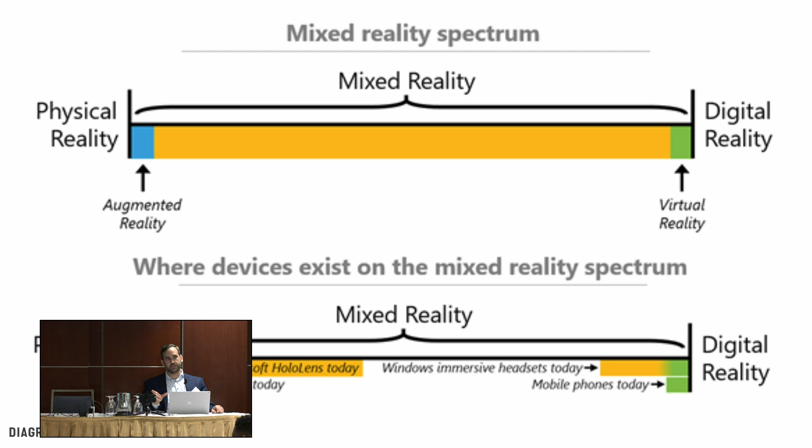So interesting to see that mobile phones, they point out, are really on a very limited part of the spectrum. So either you're sort of fully immersed in that virtual world with that phone in front of your face, or you're looking entirely through the camera, maybe adding some additional information, but you're sort of on each end of the spectrum. And I think that's going to improve as technology gets better and better. And we're going to talk a little bit about the Microsoft HoloLens today, which starts to bridge that gap between the two a little bit in a way that you can sort of interact with the environment around you.

On the VR side of things, at SmithGroup we've been all in on VR since we got our hands on the first Oculus development kit about 2016. We've now got an HTC Vive permanent install in all of our offices. This picture is actually our Chicago office, but if you visit us in DC we'll have a similar setup in our lobby that we like to get good use out of.

We've also got travel kits, big Pelican cases that we send around. They're getting smaller and smaller, but we'll take it to client sites and present it. It's a really nice way for clients to understand the space three-dimensionally in a way that's sometimes difficult with plans and sections. This is VR, a technology that's been around now, and we've gotten used to it, and our clients have gotten used to it.

One more thing that's nice to show: this is sort of the oldest school of VR, using 360 panoramas and something like a Google Cardboard, where you're immersed but in one spot. I wanted to show this because, in my mind, it's almost our first foray into augmented reality—sort of fake AR, I like to call it. We say, stand here, look at this phone, this is the view you'll have. As you take that headset on and off, you get the idea that you're immersed in the environment and feeling the surroundings and what it's going to look like in the future.

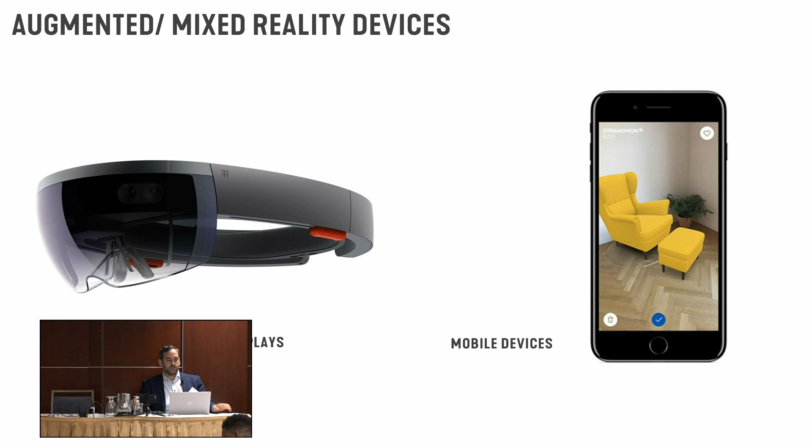As we get a little more real, off of fake AR into real AR, there are a couple different ways we can do that. One is through head-mounted displays, and pictured here is the Microsoft HoloLens. That's actually getting pretty old now—it was released in 2016, which is an eternity in this field. Everyone is excited to see, I think they said February 24th, the HoloLens 2 is supposed to come out, so that's coming soon. But there are others out there—Magic Leap, DAQRI, and others also make head-mounted displays for augmented reality. They all operate under a similar principle: there's a translucent lens in front of your face, and you can add additional information within that lens, but you can still see reality behind it.

The other way that I think is getting ready to explode is through mobile devices—a cell phone or tablet. With every release the technology gets better, and the capabilities are stronger with more interaction with the real world. Both Apple and Google make an infrastructure for developers—Google's is called AR Core, and Apple's is AR Kit. You're starting to see more and more, sometimes really simple stuff like an IKEA app where you can place a chair in a corner of a room and actually walk around it and sense motion.

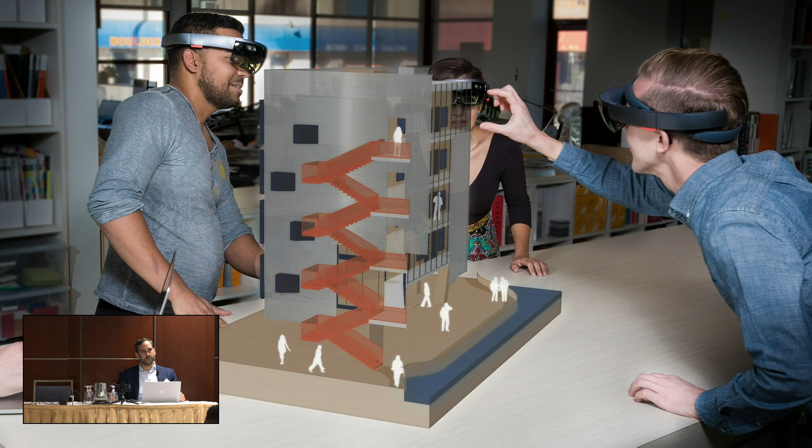At SmithGroup, the first things we saw when we started to talk about AR were images like this—from a Trimble ad, I believe—where you've got three people in a HoloLens all playing around this tabletop model as a way of presenting. That sounds great in theory, but we didn't get a lot of excitement when we presented it to our design teams for discussion. It felt more like a novelty than really useful. You've got three people around a table all willing to put on headsets—you need three HoloLenses for them all to use, and they all need to be trained and know how to use it. It's a little out there as far as how you're realistically going to use the tools. So we started to look for what I think are more practical uses.

I'll play a video here. This is Nobliss, an interior fit-out at 500 L'Enfant Plaza. One of the great things about this building is it's got fantastic views out to the Jefferson Memorial, and you look out on the new development at the wharf.

We're going to see our project designer, Rob, walking through the site with the HoloLens, and then we'll cut to what he's seeing from that HoloLens. It's a really nice way of understanding both what that future design will look like while maintaining the existing site that's there. We get these great views and understand this is completely real—what's going to be there overlaid on site.

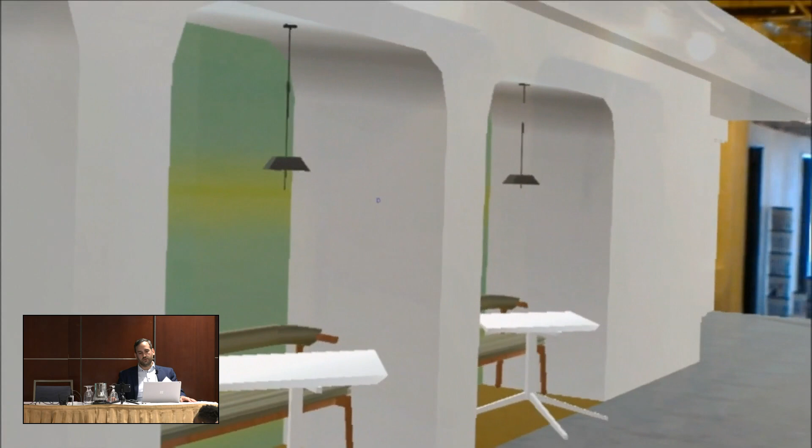And we did learn a lot of lessons from this, starting to do some of these interior projects. Some things were just, how, what do we need to include in the model? What do we really want to see, right?

So for instance, in this one, we had the floor model. That was important to design. We didn't have the ceiling. We wanted to see what was above. We didn't have any exterior walls. If you put exterior walls in there and you're trying to get a really precise alignment, but you've got one mullion that's 6 inches out of whack, even though when you're immersed in this environment, it doesn't really impact you, seeing those slight differences that aren't vital to the experience really hurt it and make it tough to see.

Has anyone, how many in here have actually tried a HoloLens? Show of hands. Handful, good group. I think for me personally, I feel like most people I talk to that tried a HoloLens for the first time

maybe didn't quite get exactly what they were expecting. There's definitely some issues that come with using it that aren't as beautiful as the advertisements show you. One thing is the field of view - when you're walking around, you've got a lens set up, but actually there's really only a very small portion where you can see the hologram overlaid. So you've got great peripheral vision, like as a human, that's what we have, but when you're in that HoloLens, really it's a very small area that's covered.

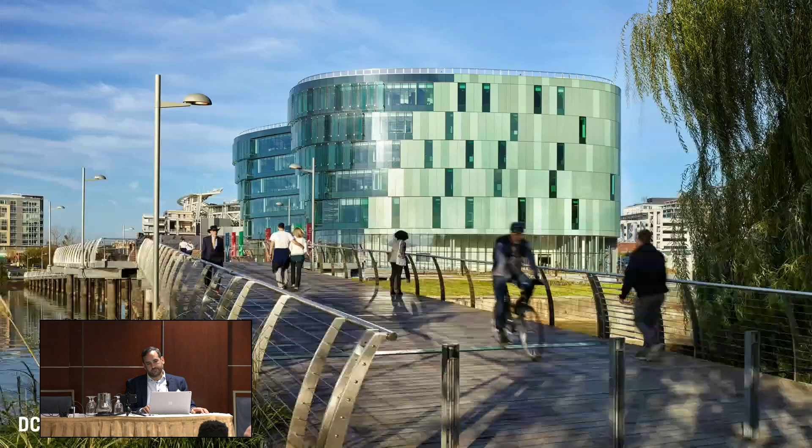So I want to talk a little bit about another project where we really, I think, took another step forward in how we're using augmented reality, and that's at DC Water headquarters, which is down in Yards Park. This was a design-build partnership with Skanska. We worked on this project, and I'll do just a little bit of quick background on the building, so bear with me here for a little bit as I get through this.

But just to understand a little bit of the basics, I think it's really important to understand that in plan, this ended up being a fully curvilinear building, and you understand why that's important in the beginning. But the form diagrams sort of show a simple bar, an ideal office space that gets pushed around actually an existing pump station on site. So there's a pump station on site down at DC Water.

It's actually pushing two-thirds of the city's overflow water through it on any particular day. So we bend around that. We sort of bend for great views up and down the river. And then we also have to maintain view sheds. So that's sort of where we end up where we are.

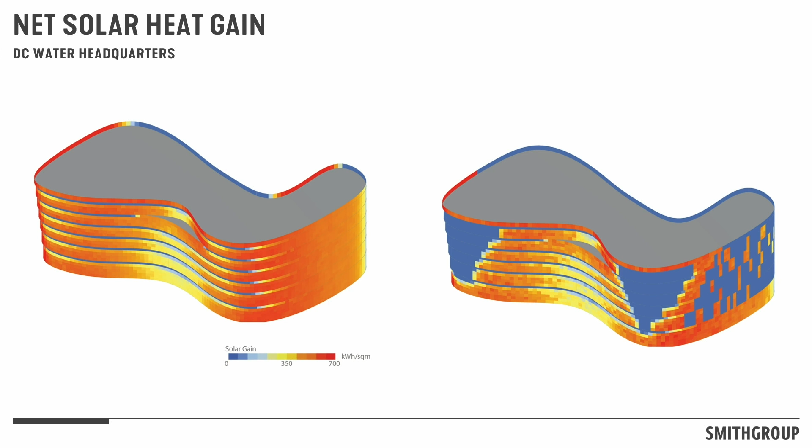We had some very sophisticated modeling that went into building out that facade. What's important from this diagram is understanding how precisely calibrated our entire facade is. So it was really vital that the areas we have as particular glass types or metal panels are where we thought they were going to be. This is showing solar heat gain on a bare form, and then how we've mitigated that with the addition of a secondary skin, as well as placement of punched versus solid openings.

So we ran into a little bit of a problem as this building started to get finished, and that was: it's looking great, but how do we really verify that it's being built as we thought it was going to be built? How am I going to go do CA on site and make sure the metal panel pattern is correct? Do you go out with a flat elevation on this fully curvilinear building and start giving check marks on each panel to make sure it's right? I got tired of even putting check marks into my PowerPoint presentation. I can't imagine being on site trying to figure that out.

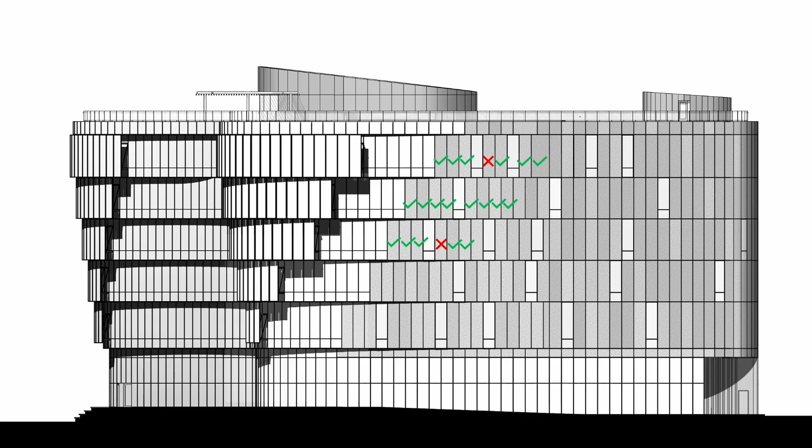So we thought there's got to be a better way, right? We've got this great Revit model that was built as part of this project. We've got fantastic data built into it—X, Y, and Z coordinates. That's sort of how we communicated with Skanska, things like edge of slab and panel coordinates. Most importantly, we've got the panel type—what is it, glass? What kind of glass? What type of metal panel? All that fun stuff.

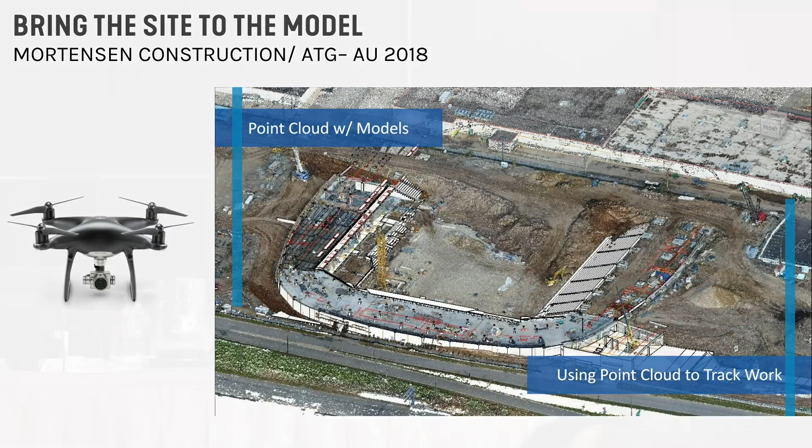So I thought, how can we overlay these two on top of each other to make this work? One option is to bring the site to the model—I think that's what the Davis guys are doing with their scans. This is actually a presentation I saw at AU this year by Mortensen Construction and ATG. They showed getting a point cloud by taking daily or weekly drone flights, and then bringing that back to the Revit model to measure from. That was one option we could have done—if we were sophisticated enough to have that point cloud information, we could have brought it back to the Revit model and compared what was there to what we have.

But we chose the inverse, as you can tell from the presentation—we said, let's take the model to the site. Here's an image of our Revit model, and this is where I think some simple things become really important. One thing that became evident to me quickly as I started testing out the technology is that the HoloLens was not going to be clear enough for me to tell slightly different shades of green in the HoloLens apart from slightly different shades of green on site. So we started to think about ways that I might be able to tackle that problem.

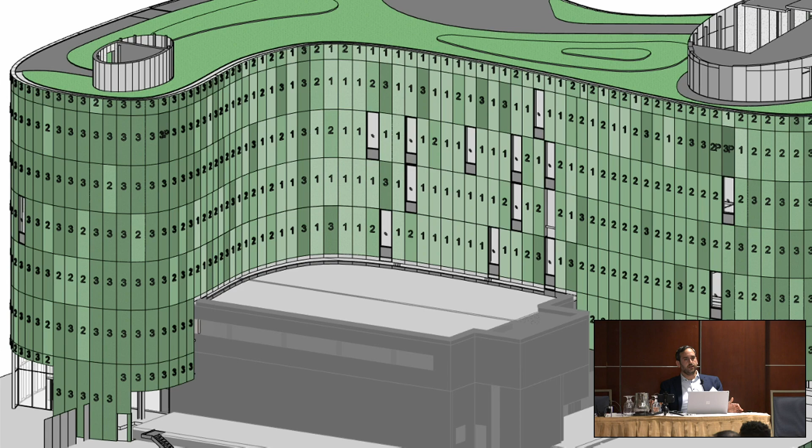In the end, what I did was build a really simple Dynamo script that placed generic models all over the building, just telling me what kind of panel it is. So I've got 1, 2, 3—I've got 3P and 2P floating around for perf panels—and those are just placed smack in the middle of the panel. That was what I used to get information back to me on site. In the end, that's actually the only thing I'm viewing on site. I'm not actually looking at my documentation Revit model at all—I've added this additional layer.

That was fairly easy for us to make because we had all the data already in the model, but it was just a matter of understanding how the technology works and what our end goal was. For this example, we used a piece of software called HoloLive, which has a simple interface. You basically pick two points in the Revit model, then go out on site and find those two points, and use those to place your digital model on site.

I've got a video that will show that whole process. It'll show the Revit model, show those isolated tags as we're moving around it, and then how I'm placing it on site. So let me get that going.

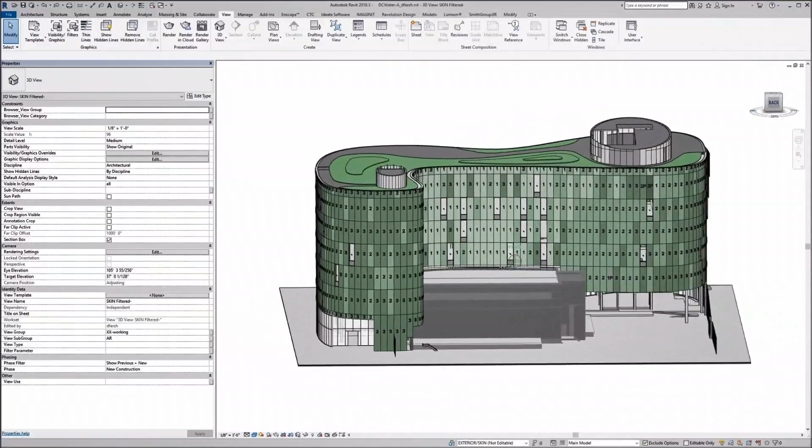Here we have the headquarters building, and you can see that we are just about done at this point, and DC Water's moved in. Here's that live Revit model as we move around, and you can see those tags—each of those curtain wall panels has all that important data built into it. Here's those isolated, and for this example, I'm just looking at the metal panels.

I zoom into an existing building on site—that's the pump station we talked about that has to stay working throughout construction. You can see the triangulation and scanning as I place those two points on site, and now my tags are calibrated to site. You can see this whole building; I see all these numbers. Actually, I can see through the building because I'm seeing the numbers beyond. But as I move around, I'm close enough that I can get an understanding of exactly which panel's in the right place. I see a perf panel's missing up at the top, and get a quick understanding of that.

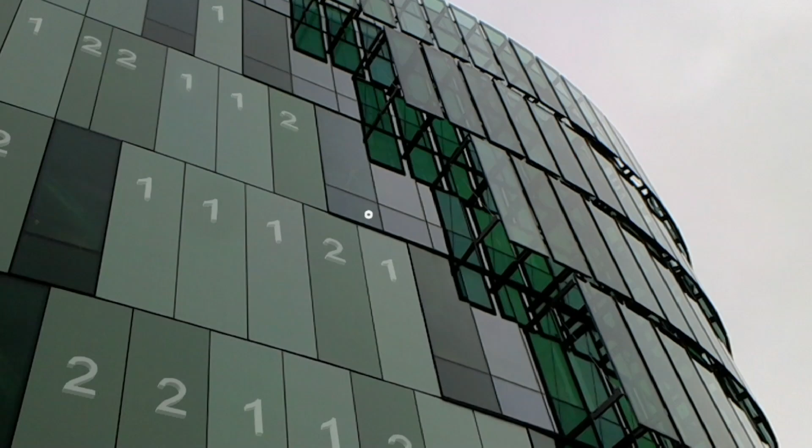That's the bones of it all. I think it's really a question of how can we make this a little bit simpler. We had a lot of issues we tackled along the way—we dealt with daylight issues. Lucky for us, the panels are on the north side of the building, so we were mostly in shade. But we did have issues when trying to get into the sun and calibrate things. In theory, I should be able to walk around the whole site with the HoloLens and my panel tags all stay in place so I can see if everything's right. In reality, I set up some strategic points around the building and would recalibrate as I moved and checked.

Actually, being on site and looking through the lens was really nice. But what became really powerful as a documentation tool was actually the video that I took, because then I can go back afterwards and make sure I didn't miss any of those 800 panels that might have been wrong. So that was really helpful.

So to finish things out, some conclusions: understand your goals—understand what you're trying to do at the end. Set up your model for success by aggressively filtering down to what you need. I think this technology has limitless potential. This is one small thing that we did, but I'm sure there are so many others out there—talk about clash detection or all kinds of other things that could be going on site, whether from an early visualization phase or much more into construction.